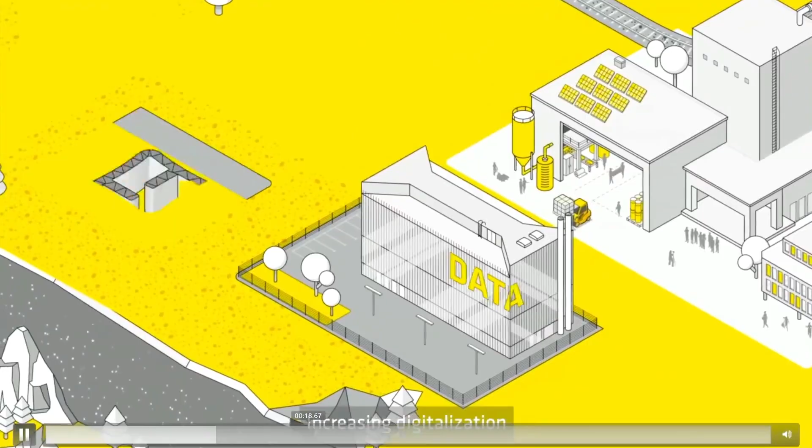For years, Sika has been pushing the construction and automotive industries forward, developing automation, increasing digitalization, and creating products with improved sustainable impact. In the modern world, you can find Sika's cutting-edge solutions almost anywhere, be it in building projects, critical infrastructure, transportation solutions, or renewable energy sources. Sika is driving change and powering improved performance, longevity, and sustainability.

Wherever you look, you can find Sika going beyond the expected. Okay, so before I proceed, let me give you a very quick intro to Sika first. I would like to make this a little bit more interactive. Anyone want to make a wild guess where Sika originated from? Can you just shout out a country? No, it's not Japan.

Yes, it's somewhere in Europe. Yes, Switzerland, yes. So Sika is basically a Swiss company, and we are a specialty chemicals company, responsible for supplying chemical-related materials for two different industries. First is the construction sector, which is where we are all in, and the other one is the motor vehicle industry, basically automotive. Some of you may not know that Sika is very much involved in automotive as well.

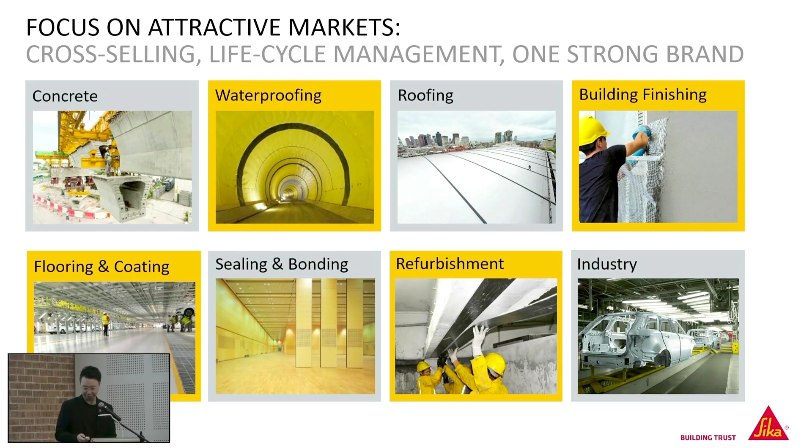Okay, so let me give you a quick intro to wet room. Wet room is a very common area, every building there's definitely a wet room. It's a room that cannot be avoided. However, it's also a room that is often neglected because of sometimes overconfidence. Sometimes it's specified with the cheapest material possible, and with that it may come with different sorts of problems, or even the wrong material sometimes.

So what does a wet room do? It's basically a room that is frequently wet, with water-related activities inside, especially toilets. That's why for wet room, it's always key to make sure that any exposed area in the wet room is properly waterproof, in order to prevent any form of seepage, whether to the floor below or to your unit below if it's a superstructure or high-rise residential structure.

Therefore, it's very crucial to select the proper or correct type of material that is durable and especially complements your tile setting material. Because oftentimes, especially for high-rise buildings or even toilets in general, the waterproofing may not complement together with the tile adhesive. I'm sure many of you may experience issues like tile debonding or tile hollowness. So we hope that in the next 1 hour session we may address all these issues, or all these concerns.

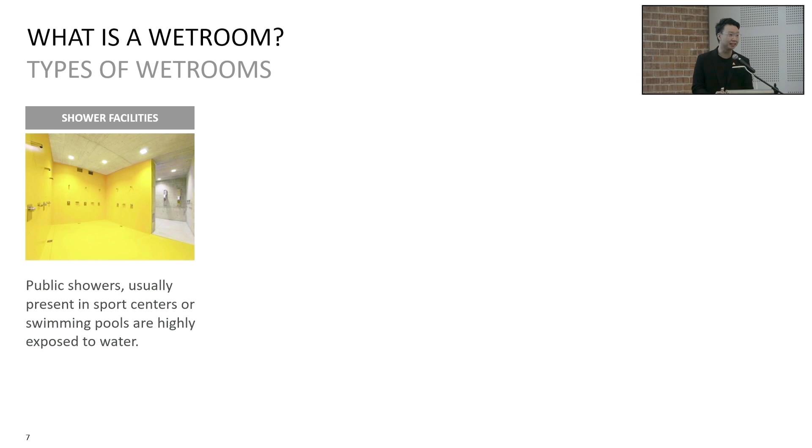All right, so what types of wet rooms are there? Firstly there are shower rooms, this is especially for public facilities. Then bathroom, this is for all residential units. Then there's kitchens as well, because many people often think wet room is only limited to toilets, but no, kitchen involves some water activity as well, therefore it is considered a wet room. Then there is also a laundry, or some may call it a yard. So these are considered wet room as well.

Okay, so why is waterproofing important? Because any water that enters your tile eventually will leak into your concrete structure, whether above or below. Therefore waterproofing is crucial to prevent seepage into a building. Oftentimes when there's an issue, when there's a leak or a defect happening, you may identify it as leakage or wet spots. And especially if it's serious enough, it will cause mold to grow on the floor below. Especially if there's a plaster ceiling, over time due to water exposure it will cause algae or mold growth, which may be hazardous to health.

There are two common types of material used for wet rooms in general. Firstly is the cementitious waterproofing mortars, or some may call it polymer modified mortars. These are oftentimes the most economical and workable, because wet rooms are more static with less movement involved, so waterproofing mortars are generally the favorable choice of material. Another material, not so common here in Malaysia, but there are certain projects that involve it as well, is what we call a polymeric liquid membrane, or liquid applied membrane. Later on I'll explain some of the differences between these two and also the requirements.

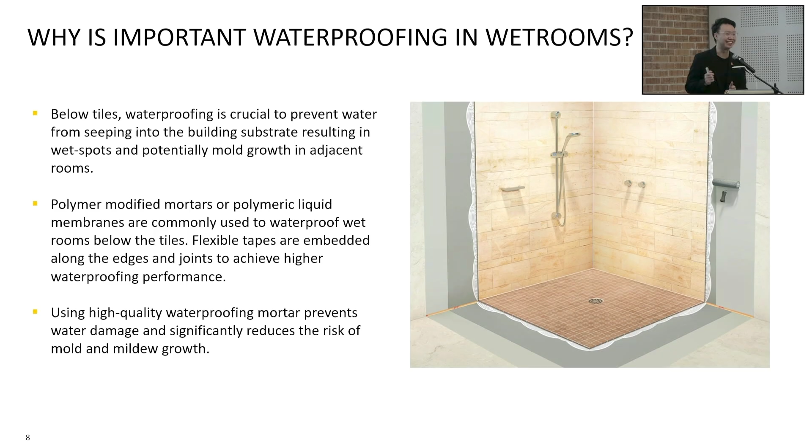Yeah, I see some are nodding ahead, in agreement. Yeah.

Okay, so some critical areas, basically surrounding the tiles. This is to debunk some misconception. Some will think that because tile is an impermeable material, but here is to show you that tiles are a bit porous as well, depending on the type of material. If they are porous, that means water is able to pass through tiles. It's not an impermeable layer. So as they allow water penetration, tiles are not 100% non-absorbent.

Another critical area as well is the joints. If you're using a cementitious joint especially, they tend to be more porous. That means there are a lot of air pockets inside, which allows water to pass through. But of course, for joints, there are different kinds of material. There's cementitious joint, or if you look into our booth later, we do provide epoxy-related joints as well. These are more watertight, promoting more water tightness compared to cementitious.

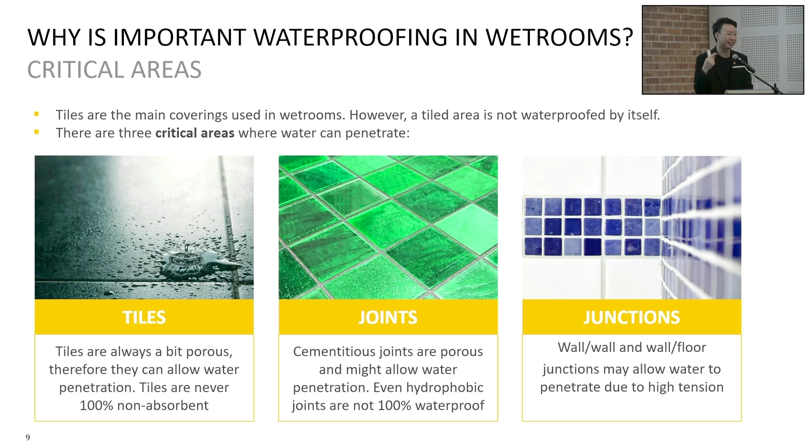Another critical area, this side is very, very important. Most often, leakage occurs because of this particular area, the junctions. Junctions are basically the construction joint between two structures, whether it's the wall-to-wall joint or the wall-to-slab joint. Another type of joint that's often neglected or less detailed would also be the joints between your downpipe outlet, your PVC downpipe, and your concrete slab. These are also another critical area where water would be able to leak through if not detailed properly with the waterproofing.

So what happens if there's no waterproofing? Let's say if the project forgot or the client missed out a certain area with the waterproofing, what will happen? Without the proper waterproofing, some issues that may occur are leakage and mold formation. Do not underestimate the issue of leakage, because to the general layman, leakage is just leakage, water can get in, so it's a problem that needs to be fixed. However, leakage will also cause further structural issues in the long term.

Because water enters through your concrete, it will start to corrode the rebar inside. As the rebar corrodes, it causes concrete spalling. With that, you need to spend more money, not just on the leakage repair, but also on the concrete repair, especially for a podium beneath the car park. This is oftentimes a very big issue because the leakage is happening all around. Either the facility management has neglected it, there's no repair, and concrete starts to spall, so they need to spend more money on the repair cost.

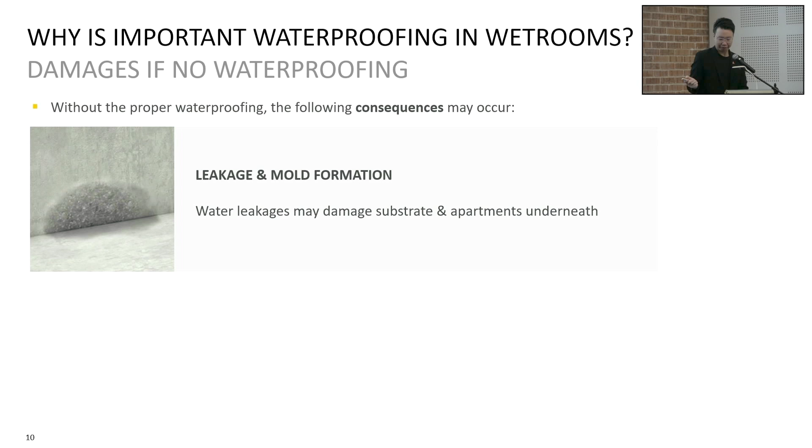All right, loose tile, HAFIZ will talk more about it as well. Any water that can enter your structure will firstly start to accumulate beneath your tile. As it accumulates, it will start to cause some delamination or debonding issue. So this is often another root cause of tile debonding or loose tiles. Sure, sometimes loose tile may occur also due to thermal expansion or thermal movement, but water leakage will also result in loose tiles as well.

Okay, so this is a bit of a quiz for you guys, also to be more interactive. Let's see how we can categorize this area into whether it's low, medium, or high water exposure. Let's start with a public shower room - is it low, medium, or high water penetration? High, correct. Public shower room is high.

Around bathtub and shower - okay, the first answer was correct, was medium. Not so, because people come out of the bathroom, not so much water dripping out compared to the public shower room. Around the tap, basically around your sink - lower, yes, correct. Private kitchen floor.

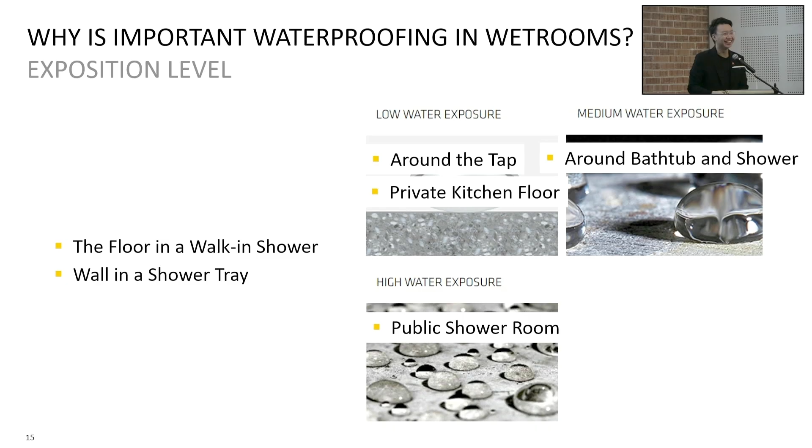Low also. Okay, the floor in a walk-in shower - this one is high, quite high, because people also just finish showering and then they come out, and especially when they're standing, water all drips down.

Okay, wall in the shower tray is considered medium, because this is the wall, not the floor. So we consider medium because it's mainly due to water splashing, not water flowing.

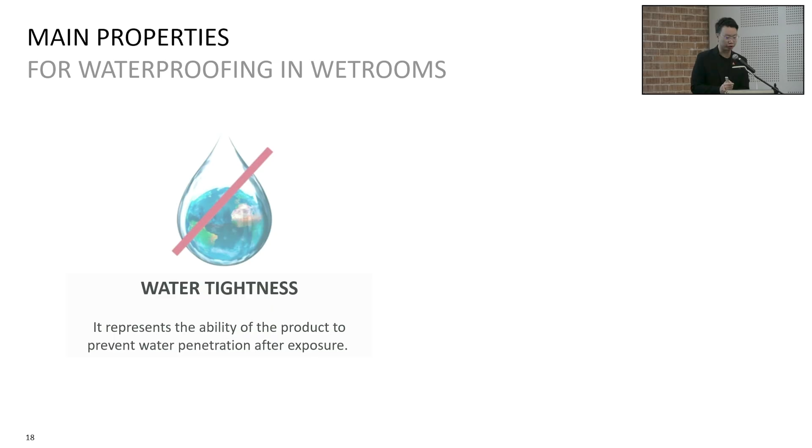Okay, so some main properties of waterproofing wet rooms. There are two important properties to note. Firstly, water tightness, or the performance of the waterproofing material. This is crucial - if your waterproofing material is not watertight, can we consider it a waterproofing material? Not really. So what is water tightness? It's the ability of a product to prevent any form of water penetration after exposure.

Another important property, often missed out, is crack bridging ability. Ask any engineering consultant, engineer, or contractor - they will never guarantee that their concrete is crack-free. No such thing, because every concrete cracks, it's just a matter of extent. Fortunately for wet rooms, it's more static, so there's lesser risk compared to outdoors. However, it's important that as your concrete cracks, your waterproofing material needs to withstand the cracks. Generally for waterproofing mortars, there's a crack limitation, usually up to 1 or 2mm. If you're considering a liquid applied product, there'll be higher flexibility. Just take note that crack bridging ability is important - if concrete cracks and your waterproofing cracks too, then it's compromised.

In Malaysia or globally, there's no one sure standard for all kinds of areas. But in Malaysia, EN 14891 is the general standard we usually conform to. This relates to liquid applied water impermeable products for ceramic tiling or building finishes. The rest are more towards the European standard.

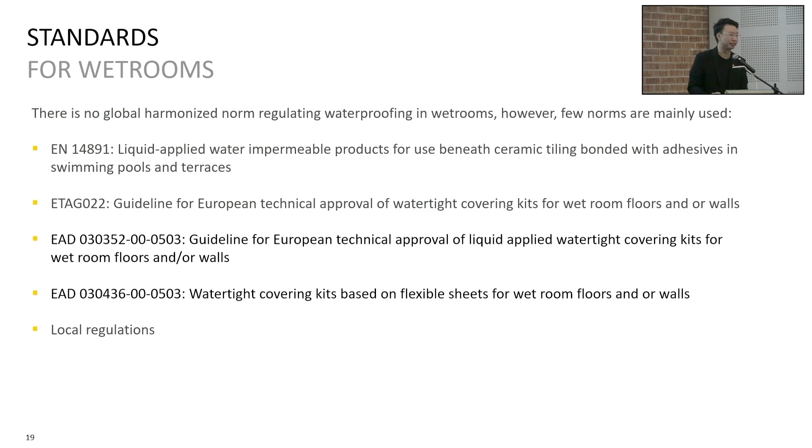Here are some main highlights showcasing some of the waterproofing technologies available. Firstly, cementitious waterproofing mortars - very easy to use, usually comes in 2 parts, part A and part B, which you mix together to form a cementitious slurry. Just use either a roller or a trowel if you want to maintain consistent thickness of your coating. Some limitation - because it's cementitious, it's more rigid, so it doesn't readily withstand extended movement. For example, a balcony is a semi-exposed area with thermal expansion due to weather or sunlight exposure, so you need a more flexible material there. However, for wet rooms, a rigid material should be good enough - it depends on how much movement you're expecting. If your building uses an IBS system - a prefabricated building system - that area will tend to have more movement, so you need a slightly more flexible material to withstand it.

Another one, liquid applied membrane, also easy to use, usually comes in part A and part B. If it's water-based, it usually comes as a single component. There's a higher requirement for this material - to apply a liquid applied membrane, your building's moisture requirement usually cannot be more than 4%. I know for paint the moisture tolerance is about 16% or 8%, but for waterproofing liquid applied, generally the substrate requirement is less than 4%. But what it provides is better flexibility for your structure, generating higher performance compared to cementitious.

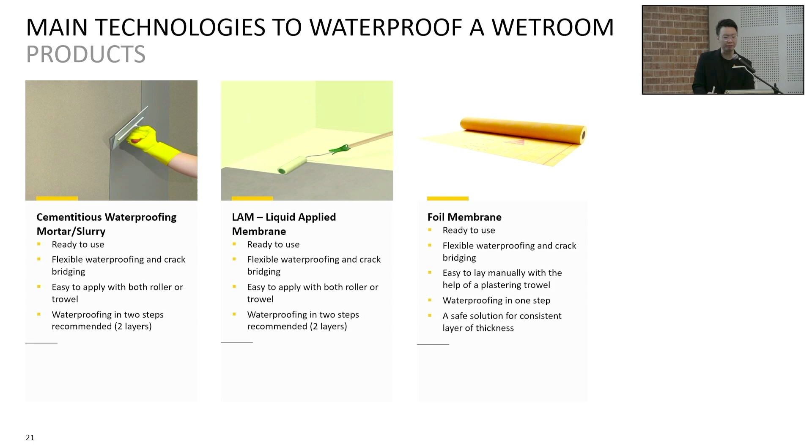Another one, foil membrane - not common here in Malaysia, but very common in Europe. This type of membrane doesn't work by itself; it's complemented by an adhesive, usually the cementitious waterproofing mortar. You apply the waterproofing mortar, then apply this foil membrane and stick it directly on. With that you get very good watertightness for your wet rooms. Not too common because of the cost - it's usually proposed for luxury residences or swimming pools, where foil membrane is considered for the extra assurance.

Okay, another one, this is more towards the joint treatment. These are the seal tapes for all the corners and detailing. What it does is basically an angled fillet replacement. Because any form of waterproofing needs an angled fillet for all the corners - basically a 45-degree gradient provided to make sure your waterproofing is able to upturn correctly without inducing too much stress. Because any 90-degree upturn, not just for cementitious but for liquid applied, will cause stress if it's a direct 90-degree sharp upturn.

So without an angled fillet, it will usually cause a crack along the joints. But sometimes a client does not want an angled fillet, so they will go for a seal tape, because the seal tape itself is a waterproofing material.

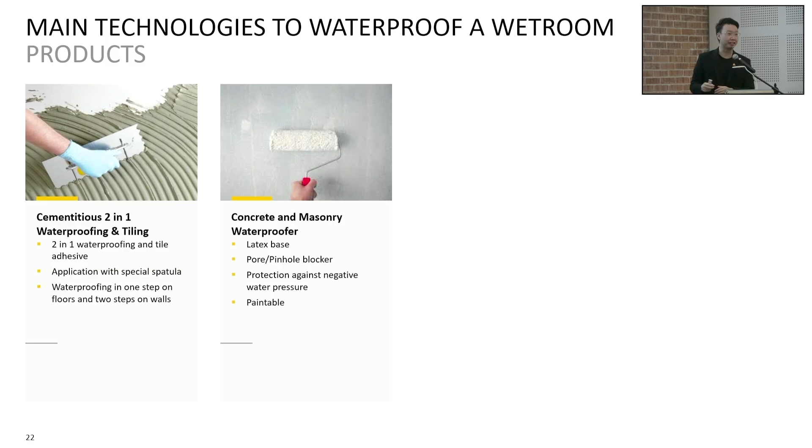This is just to give you some knowledge. Another one, this is also interesting - this one is concrete and masonry waterproofer. This type of material is more latex-based and is designed to withstand negative water pressure.

Very common, this one, very common in the US. However, because of how it works - it acts as a pore blocker, meaning it blocks any sort of pore along the walls - that's why you can use it against negative water pressure. That means if one room is leaking to another room, you can apply it from the other room to block the leakage.

But in the US, because of the effectiveness of this material, it caused a problem of its own. Certain housing in the US has basement structures for their homes, and oftentimes, because of the high water table, basements leak easily. So what they do is buy this latex-based material and apply it along the leaking wall. But because it completely blocks the pores or the leakage, water gets trapped inside their basement walls. Over a long period of time, the basement wall gets damaged because water is stagnant there.

It's not to say that this product is high risk, but it's because they use it at the basement. If you use it just along a wet room, it's generally fine because there's a low volume of water.

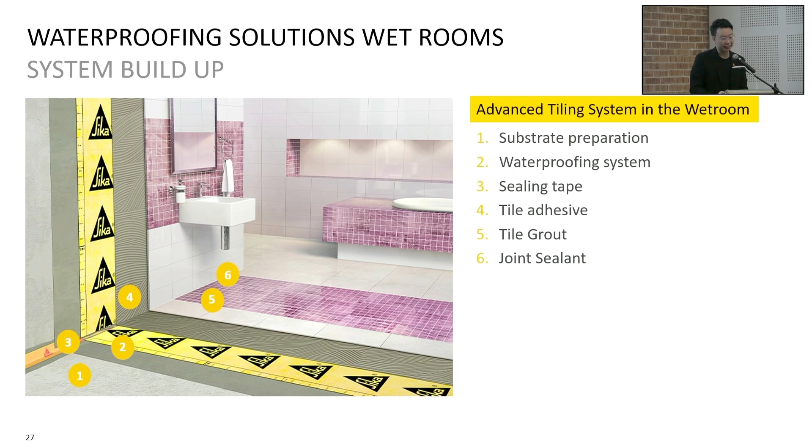So this is one of the systems using a foil membrane. One advantage of the foil membrane is that you can either install it along the concrete surface or install it on top of your screed material, immediately bonded with your tiles. So this is one advantage of the foil membrane - it's more flexible, whether you want to install above or below.

So some summary - these are usually the materials involved for your wet room system. Usually there's a primer, because it enhances bonding, together with either cementitious or liquid applied waterproofing. Then there's also a sealing tape or angle fillet. For info, in case you don't know, the angle fillet is this - you can see this triangle area here. This provides a gradient that is not 90 degrees. If they don't want an angle fillet, then there's a solution using the sealing tape instead.

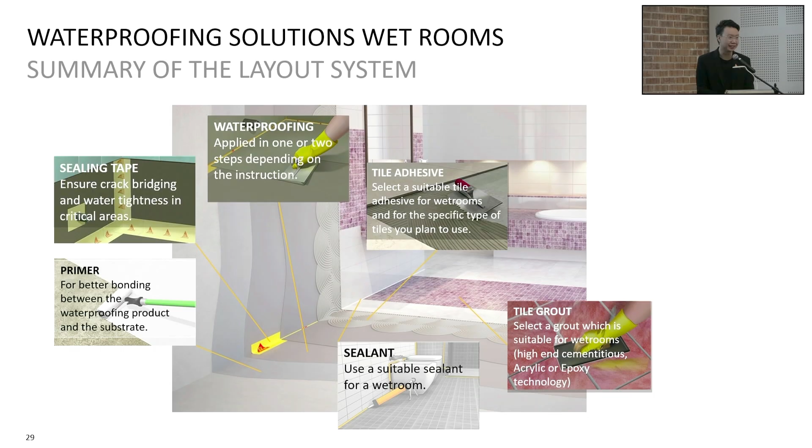So again, there's a primer, sealing tape, then there's also the waterproofing layer, followed by your tile adhesives and sealants for all the joints, especially the corners. And then there's also tile grout - a few choices there, either high-end cementitious, acrylic, or epoxy. Later on, if you want to find out more, our booth is outside showcasing these materials.

So lastly, this is the end of my presentation. Basically, my closing point is to speak to us, because at Sika we have a large team of experienced individuals, and Sika is also involved in some of the biggest projects in Malaysia. We have been waterproofing since 1910 - that's the start of Sika company. At Sika we have a wide range of products, providing a one-stop solution all the way from the basement to your rooftop, from waterproofing to flooring, building finishing, and construction joints.

All our solutions are aimed at reducing your risk and making sure our products provide value to your projects. Again, just speak to us, because we have a team of qualified experts providing specifications and design support. We even have specialists on standby in case you have any concerns about your project or any problems faced - you can just talk to us. So with this, thank you for your attention.

Wait, before I continue, is it possible for me to take a selfie first? Can what?

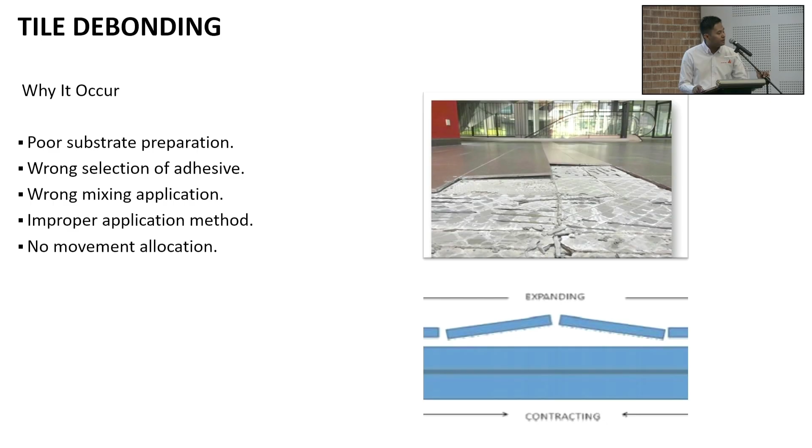Just a quick one on tile debonding issues. When we receive complaints from customers at projects, the first thing we check is the substrate preparation. Most of the root cause of these debonding issues comes from the substrate not being done properly. Second is the improper application of the tile adhesive — what I mean is tilers are not using the right tile adhesive based on the type of tiles they're using, which I'll explain later, and also their tile size.

So when we go to the sites and ask around and do observation, the first thing we check is the application — how tilers are using the tile adhesive. Normally, referring to this issue, what tilers do is they mix, say, 5 buckets or 5 pails, and go to smoke. After 1 hour, they only come back and do the installation. That is the first root cause we always find.

The second is substrate preparation, which is very key here, because the tile itself — like John mentioned — is neither fully absorbent nor fully non-absorbent. So if the substrate is not pre-wet before tile installation, it may cause the water in the tile adhesive to be sucked by the substrate. When this happens, it can cause debonding because the tile doesn't properly adhere to the tile adhesive. The third point is that we always observe tilers not using the right tile adhesive based on the tile itself, which I'll explain later — how to choose the right tile adhesive for your application.

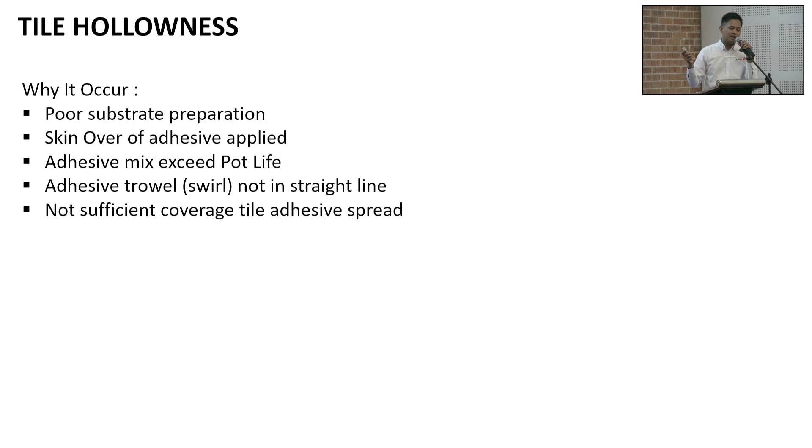When we check on site, the first thing we do is check on the hollowness, and then we ask the tilers to take off the tiles to check the back of the tiles, to see if it's fully covered by the tile adhesive or not. This is a very important key here, a very important note: to minimize the risk of hollowness, we need to make sure the spread of the tile adhesive at the back of the tile is maximum.

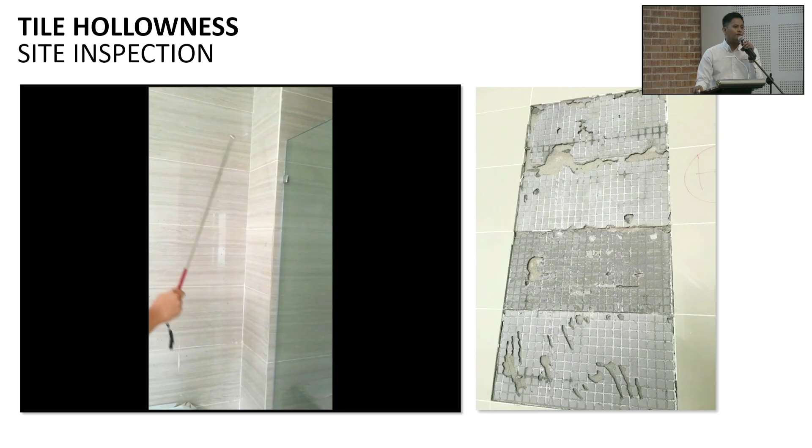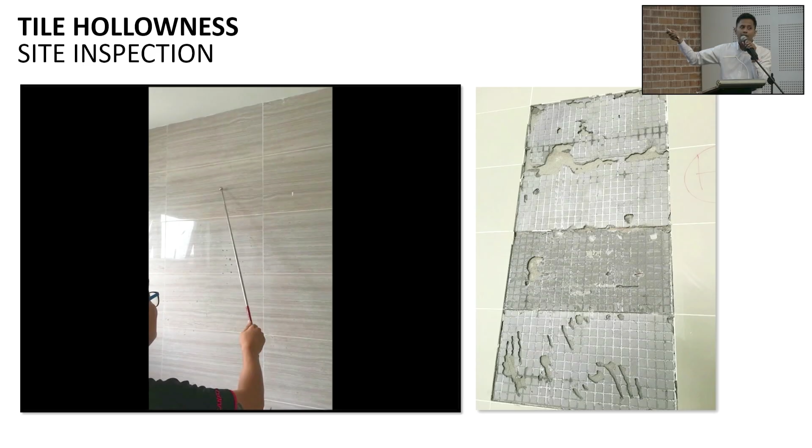This is a very common inspection. I think most tile adhesive manufacturers always use this when we receive complaints from our customers to check on hollowness. This is the sound of hollowness. As I mentioned earlier, we will ask our tilers to take off the tiles so we can check what's happening at the back. It is very common when we receive a hollowness issue.

The third common issue that we face in construction sites and projects is lippage. Lippage is mainly because the application area is open to public traffic too soon, before the adhesive itself is secured. This is a very common root cause of this issue.

The second point is the application and how the tilers install the tiles. If you're not aware, at the back of the tiles there's an arrow. This arrow is made by the tile manufacturer to guide tilers to install the tiles in one direction.

Now I'll go to how we choose the right tile adhesive during installation, because now we already know the three main issues that we face in projects.

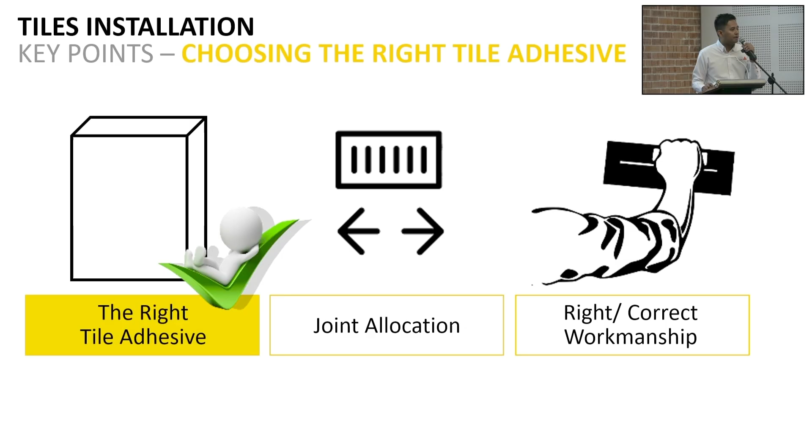When it comes to tile installation, we have to make sure these three key points are very important: choose the right tile adhesive for the application, the joint allocation, and most importantly, the workmanship. No matter how expensive or good your product, the tile adhesive and tiles you're using, if the workmanship is not good, not done properly before installation, you will have an issue.

When it comes to choosing the right tile adhesive, there are a few factors we always recommend to our clients. Number one is the type of finishing or type of tiles in your project - is it ceramic, porcelain, small tiles, or big tiles.

The second consideration is the type of substrate, because different substrates have different roughness and different water absorption rates. Very common in projects nowadays, we see concrete walls with a very smooth finishing if they use formwork, and we have brick walls, very common. Nowadays we also see drywall substrates.

The last but not least factor is where you apply the tiles - is it internal, for today's session, of course, internal wet rooms, or external application. Normally for external application, where the area is exposed to direct sunlight, you will require higher technical performance of the tile adhesive.

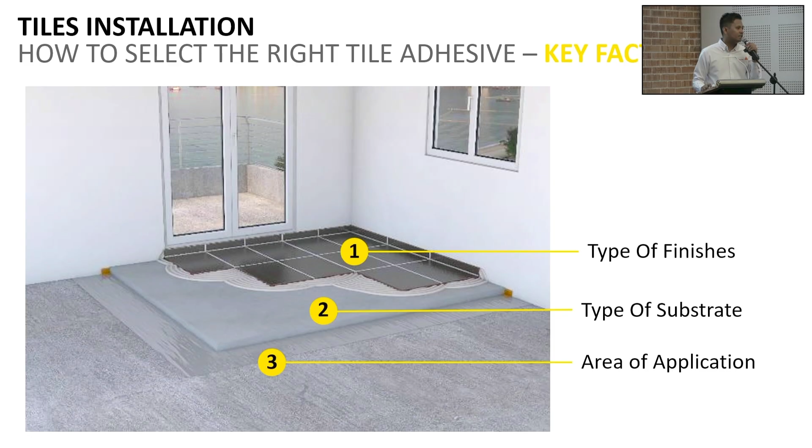Now I'll go to the first topic, the factors I mentioned earlier - the type of finishes, type of tiles. In Malaysia, all tile manufacturers follow ISO 13006. Under this ISO 13006, we have 5 groups of tiles, classified based on the water absorption rate.

It's very common in projects nowadays to see the B1A category - it's a porcelain with dry press manufacturing technology. Okay, you can proceed to the next.

The next important factor of the type of finishes or tile is tile size. Maybe 20 years back, the most common tile size was 1 foot by 1 foot. But nowadays, we can see big tiles coming in. The biggest tiles I've seen are 1.6 by 3.2 meters, not in Malaysia, but in China. Our neighboring countries like Indonesia and Thailand are also seeing these trends coming in. I am sure it's a matter of time before Malaysia faces this trend as well.

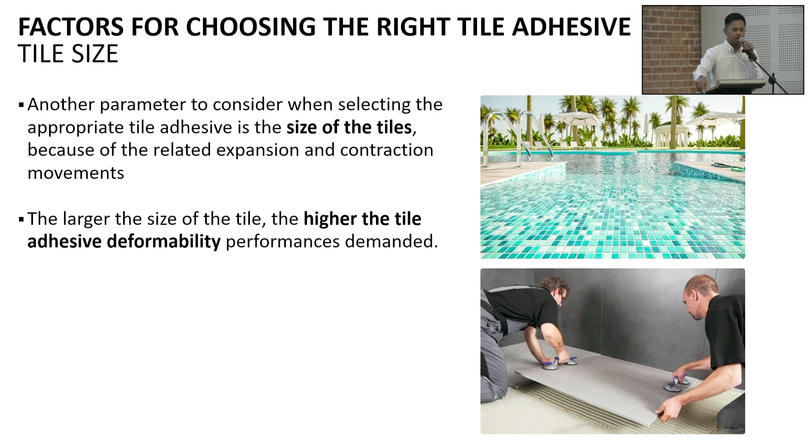The second part of the topic on how you choose the right tile adhesive depends on the substrate you're using. The three common substrates I have seen personally are concrete wall, brick wall—very common—and dry wall.

The next point is the area where you apply this tile adhesive. Normally, internal dry areas like the living room have less stringent requirements compared to external applications where heat is involved—the expansion of the tile, because tiles themselves can expand and shrink. This is very important for your consideration when you choose the right tile adhesive.

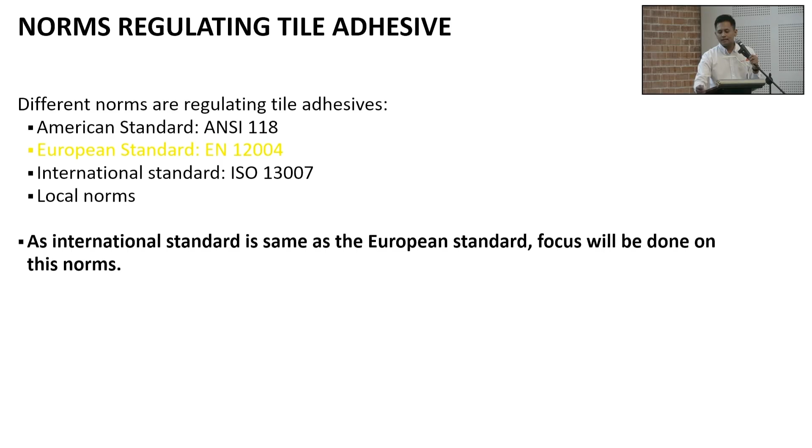Just a little bit on the norms that regulate tile adhesive products. Globally, we have a few standards, but in Malaysia we focus on EN 12004. What is in EN 12004? It regulates tile adhesive—cementitious tile adhesive, dispersion like acrylic base, as well as epoxy base or resin.

For today's session, I will mainly focus on cementitious tile adhesive, and I'll try to simplify it as much as possible so it's easy for you to understand. The technical requirements for cementitious tile adhesive in EN 12004—this is the must-have.

Number one is tensile adhesion strength. We measure tensile adhesion strength for normal condition, thermal aging or sometimes called heat aging, and third is water immersion. In Malaysia, the standard also has freeze-thaw cycles, but that's not really a concern for us because we are not a four-season country.

The next requirement in EN 12004 is the open time, which is 20 minutes. This is the first part of EN 12004.

The second part of EN 12004 is the improved characteristics of tile adhesive. It's not compulsory, it's optional. Number one is T, or thixotropy, also called slip resistance—the minimum requirement is 0.5 millimeters. The second improved characteristic is E, or extended open time.

And as you have bigger tiles, minimum 300 by 600 millimeters, we already start to use extended open time because it allows you to adjust, to apply the tile adhesive at the back of the tiles, and also to adjust the tiles when you install them. Slip resistant T is for wall or vertical application. S1 is mostly used for external applications where there's direct sunlight. S2 is not common in Malaysia—it's mostly used in countries where there is earthquake risk, like Indonesia.

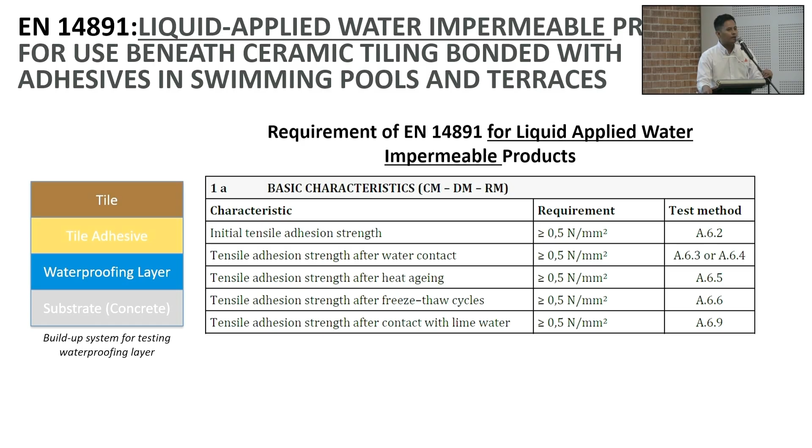This is an additional requirement I would like to highlight and emphasize here today. John has shared about EN 14891. This is for liquid apply waterproofing layers that we normally test at site and also in the lab. On the left side, the waterproofing layer build-up is substrate, waterproofing layer, tile adhesive, and tiles. According to this standard, it's not only cementitious waterproofing materials, but also dispersion like LAM (liquid apply membrane), DM, and RM (resin, epoxy base). The minimum requirement for this standard, for any type of tile adhesive, either C1 or C2, is 0.5 MPa. This is very common testing done at site when it comes to waterproofing layers.

That's all for tile adhesive standards.

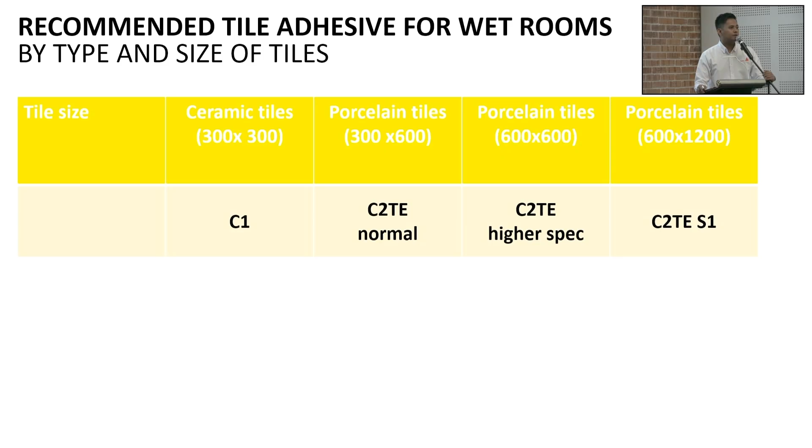Now I will move to how we actually choose tile adhesive for internal wet rooms based on the type of tiles. I'll summarize this in a very simple way to help you select the right products for your internal wet room areas. For ceramic tiles of 300 by 300 millimeters, we recommend minimum C1, though you can go above. For porcelain tiles of 300 by 600, it's C2 TE. Most manufacturers have two levels of C2 TE products: normal and premium, with premium having more adhesion strength. For porcelain tiles of 300 by 600, we recommend normal C2 TE. For bigger tiles up to 600 by 600, it's recommended to use C2 TE premium or high spec. For porcelain tiles above 600 by 1200 millimeters, use C2 TE S1. This is a general guideline for tile adhesive selection for your wet room projects.

The next important consideration is joint allocation. It is very crucial to avoid tile buckling issues. For wet room areas in the bathroom, we recommend joint treatment using sealant at the joints, exactly as John mentioned earlier. This joint area is very critical in wet rooms to avoid buckling issues later on.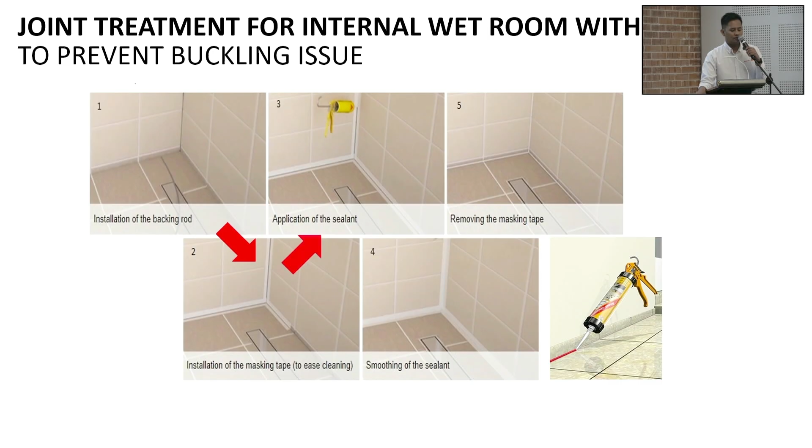This is a very important part. I think I will spend more time on this workmanship factor because it affects all of us - it affects the tile adhesive manufacturer, tile manufacturer, as well as you.

Substrate preparation work is very crucial - it's important to make sure the substrate is clean, with no oil, especially when it comes to formwork application. There's always oil, so we have to remove that. Before installation, we have to make sure it's pre-wet - not flooded with water, just a little pre-wet, so that the substrate will not suck water from the tile adhesive.

An additional point we'd like to highlight is the back of the tiles. Some tiles show white powder at the back - this is very common because of the manufacturing process. When they manufacture the tiles, they put powder at the back on the tray, resulting in white powder at the back of the tiles. We recommend our clients and tilers actually clean the back of the tiles to ensure better workmanship.

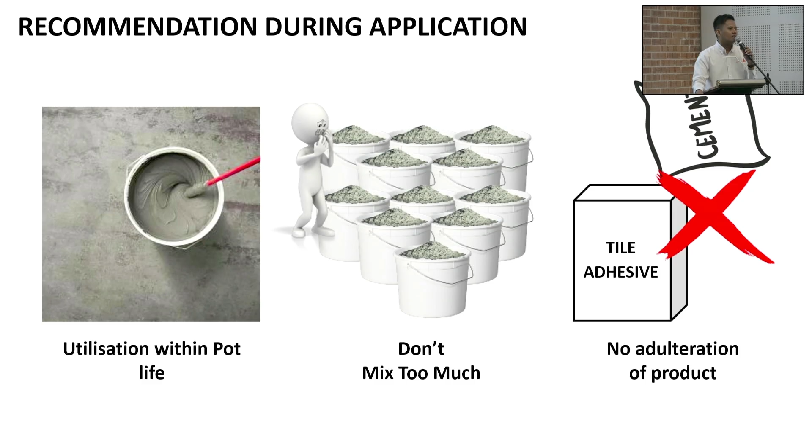The tile adhesive is a pre-pack, so everything's already inside — you just have to add water. Nowadays it's rare to see tilers or applicators adding something else like cement or additive. Back then, maybe 10 years ago, there were plenty of workers who added something inside, or only God knows what that was. But please, if you see this at site, tell them you don't have to add anything else, just add water and mix.

When the pot life is over, skin over formation happens. This is a thin layer on the mortar, especially when it's hot or too windy. When skin over is formed on the mortar, you can check with your hand — just touch it. If nothing sticks on your hand, that means skin over is already formed. What we recommend to site is to just remove that layer and remix again — it can still be used.

But for open time, when you apply on the tiles or on the floor or wall, if the open time is exceeded, you can touch it first and if there's no mortar on your hand, we can just trowel it again. Or if it really cannot be used, just remove it and apply another layer. This is the right practice and what we recommend to our tilers.

Just a quick one, based on the audience's expertise or experience — which one is the best way of applying tile adhesive? Just a quick survey: who says it's back buttering? Raise your hands. Who says troweling? Who says both of them? Okay, 2% are right, so that is the best practice.

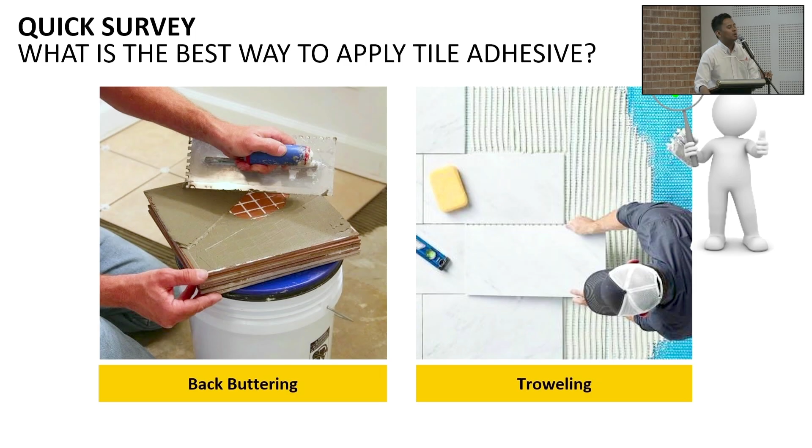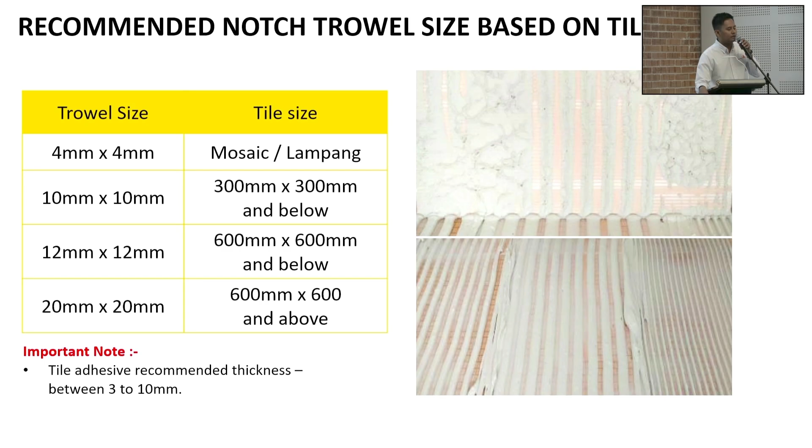Another recommendation is to use the right notch trowel. You can also do inspection during the project — go to site and check which size of the notch trowel is being used for your tiles. This is just a minimum trowel size requirement recommendation. You can see here, 10 by 10 is very common at site, and we recommend using it for 300 by 300 tiles. Of course, as the tile size goes bigger, it's recommended to have a bigger notch trowel size.

This is the right process for installing tiles at site. As I mentioned, the best way of installing tiles is using both back buttering and troweling. Then you put the tiles, install them, and tap to make sure the tile adhesive spreads evenly at the back of the tiles. Check the level, and for confirmation, just turn over the tiles.

This is something we always do at site during inspection — just to make sure our tilers are doing it correctly, we ask them to pull the tile so we can see the coverage at the back. If it's not fully covered, we ask them to do it again or add more tile adhesive to make sure it's fully covered.

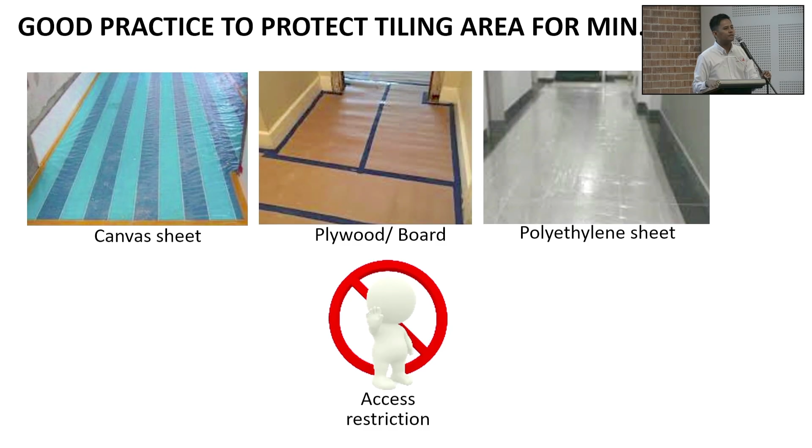This is a good practice that we've seen so far — covered, thank you so much. Cover the areas for a minimum of 24 hours, just to make sure leakage issues or other issues don't happen in the future.

I'll finish with the tile grout products and solutions that can help manage your project properly. This is a very common issue we see in tile joints — efflorescence. This is very common, especially for cementitious tile grout, mostly because of the way we apply the products. For swimming pool areas, we normally recommend a higher spec of tile grout. Unfortunately, in Malaysia most applicators are using a very basic tile grout, CG0 or CG1, which is not enough for this type of application.

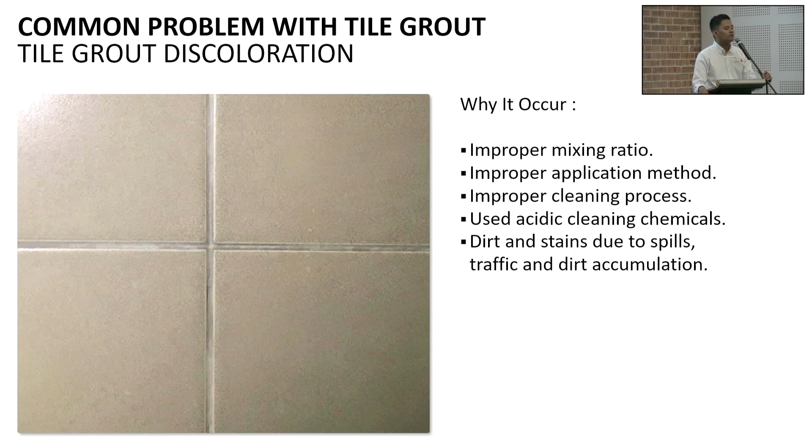This is also another common issue in tile grout application: discoloration. In the market we have cementitious tile grout, epoxy, and dispersion acrylic base, but I would highlight that epoxy tile grout is the best. It's a bit more expensive, but it gives a better finishing. Most epoxy products come as one set, so the color discoloration risk is minimized and it has better performance. Normally it's waterproof, much better than cementitious tile grout, and also more durable.

Okay, I see my notification. I have a quiz, can I get 5 minutes? Okay, it can also be part of the Q&A session. We have some small gifts. John, maybe you can come also.

So this is the first question: what is the right steps for wet room application? It's not arranged according to the right sequence. Anyone will try?

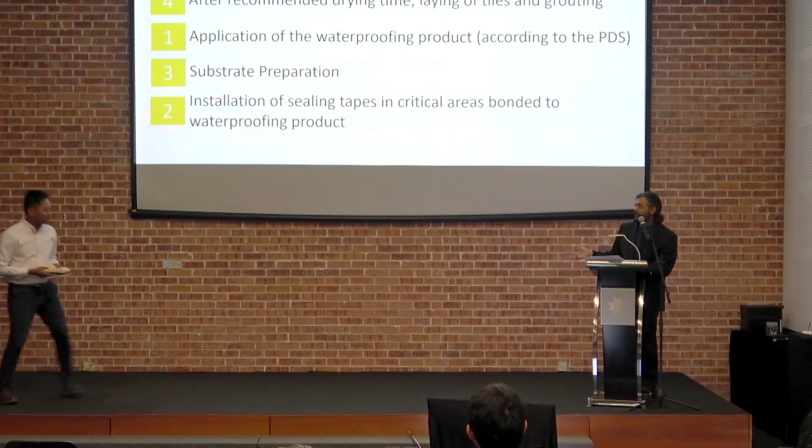So anyone would love to try this question? Okay, this is a lady with the mask. 3124? Is it correct? Actually it's correct, 124 is okay, yeah, actually it's the right answer. Congratulations, this can be either way, for two and one. Yep, you're right, small gift.

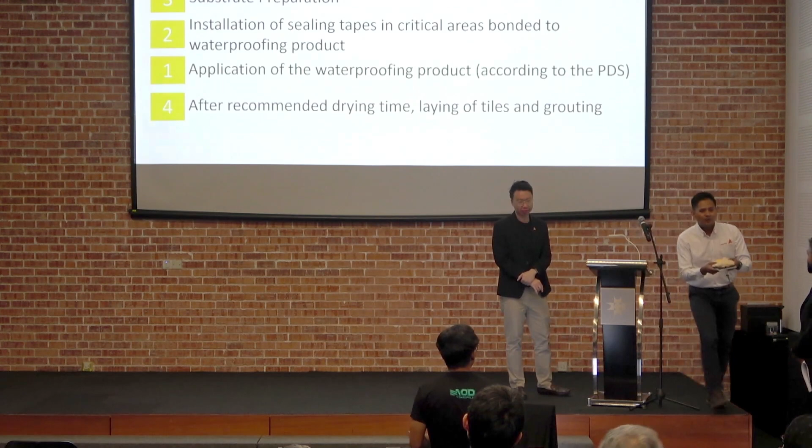Okay, congrats to our first winner. Is that someone's PIN number, by the way, or ATM machine or something? 3214. Okay, so can we have the second question to the quiz? We got 5 gifts to give away.

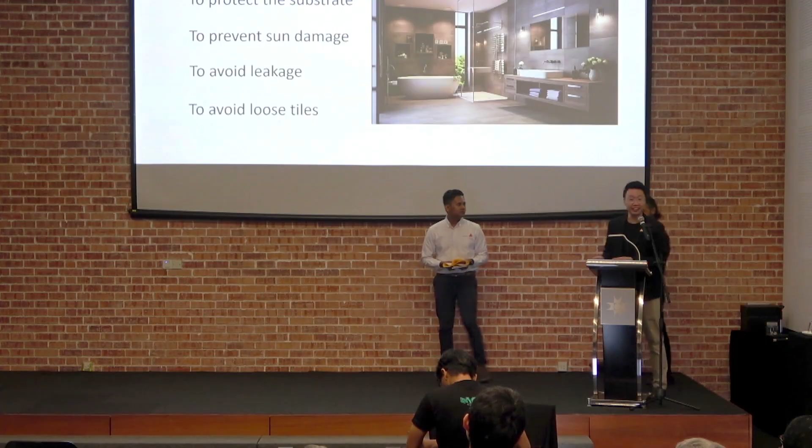Okay, this one is a bit multiple choice: why is waterproofing needed in wet room? Of course, to avoid leakage. That's one, any more? More than one answer. Just one is a bit incorrect, anyone want to try? Sorry, 1 and to protect the substrate. Okay, 1 and 3, let's see, this is correct. Waterproofing is not meant as a UV protection material, and then yes, avoid leakage, and actually it's to avoid loose tile also, but we can give that.

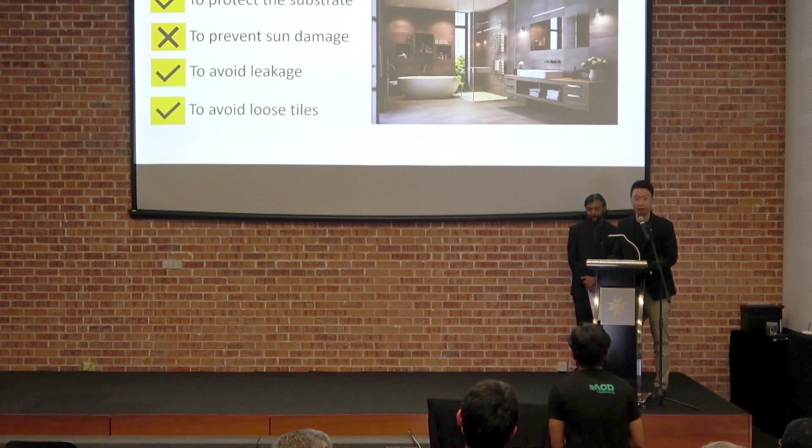One thing I want to add here: to prevent sun damage, because a lot of people think they can just apply the most basic material, for example for their rooftop or car porch. We did encounter a lot of situations where clients, usually homeowners, apply a cementitious waterproofing for their roof slab. However, because it's directly exposed to outdoor conditions, it causes rapid shrinkage, and as a result your cementitious coating will crack. So this is just an add-on.

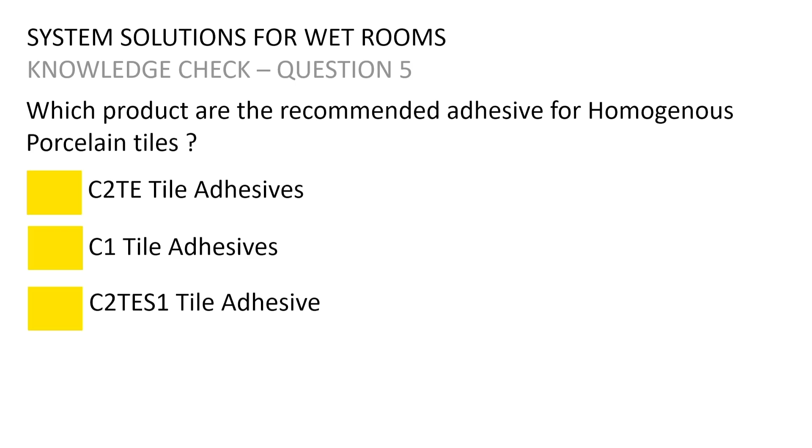Okay, last one: which product is the recommended adhesive for homogeneous porcelain tiles? There's one behind that, for both normal size and big size. I'm giving a hint here. C2TES1, who said that? There's a gentleman behind there. C2TES1 only. C2TE also, yes, the right answer.

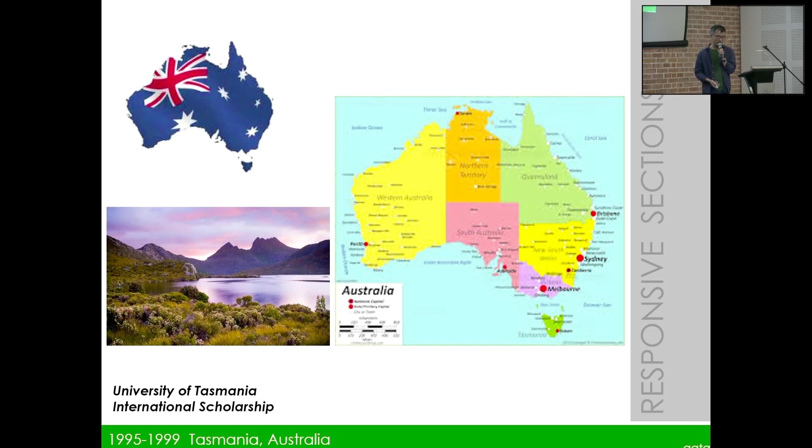I studied in Tasmania, a small island state. Most Australian graduates would probably study in Melbourne, Sydney, Perth, Adelaide or Queensland, but Tasmania would be the last choice. It happened because I was offered a scholarship, which saved a lot of school fees. During the formative years in Tasmania, since it's a rather rural setting, we studied in the city of Launceston, which has only 200,000 population. Some of our lecturers and professors designed small, beautiful houses in natural settings, compared to the Melbourne and Sydney schools, where students would be exposed more to an urban setting and urbanized design.

We started the first year of our work by exploring building in the landscape context, looking at spatial orientation. Inevitably you have to deal with sections, because of the roof and openings where you bring natural light into the spaces. So we were exposed to sustainable design at a very early stage - even without GBI, we naturally became inclined to design very natural, responsive spaces. It teaches us how to appreciate nature. Although I grew up in the kampong, in Malaysia with lots of green spaces, we never really appreciated nature. Only after studying in Australia did I come back and see that our country is very beautiful, and that there's a lot we can do as architects to preserve our pristine nature.

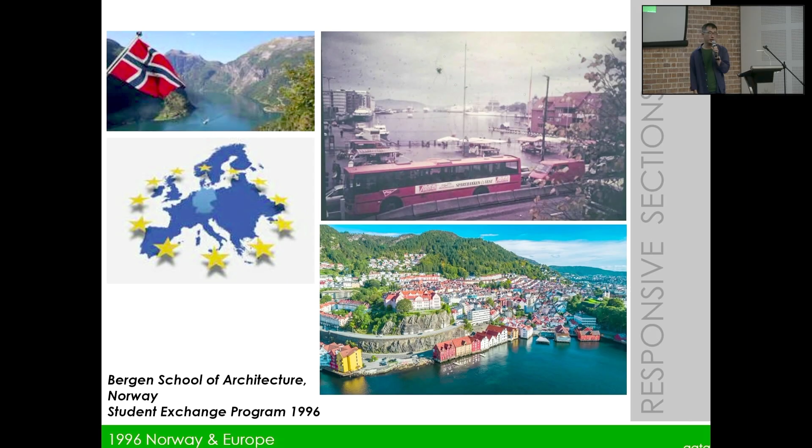During my studies in Tasmania, I also went for a student exchange to Norway. That was, I think, the biggest and most important decision I made as a student. Rather than just stay in Australia, which is so isolated - you can't see buildings like those modernist works by Corbusier or Alvar Aalto unless you go to Paris, where there are so many beautiful buildings we study in textbooks but never get to experience - I took the chance and went for a student exchange to Norway. I also backpacked around Europe for 2 months, visiting about 9 to 10 countries.

As an induction course for student architects in first year in Bergen, Norway, we actually had to build a small building in the forest. The timber was sponsored by a timber plantation company - similar to the furniture you see in IKEA, which uses plantation timber considered a sustainable material, since you don't chop down rainforest or old-growth timber, but harvest plantation timber for the furniture and building industry.

So we had to build a small structure without much prior knowledge. The students came together, made a model of it, and then started building. We only spent about 2 weeks there in the forest to build this. You can see there's already a collection of buildings, because it's a tradition there that one batch follows through from another to build these collective structures.

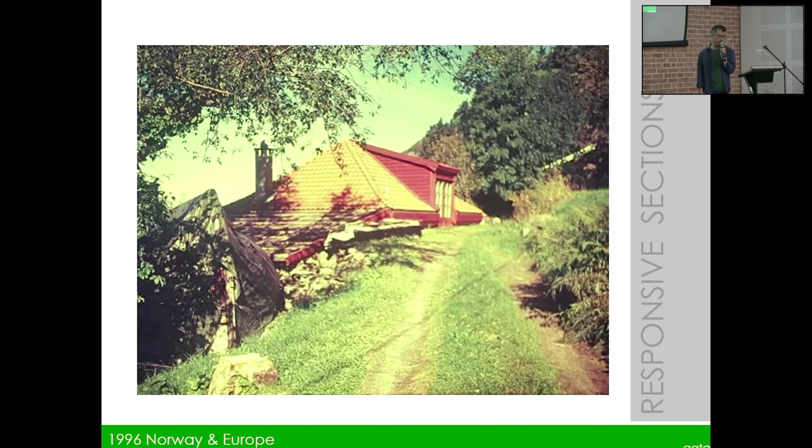And I also managed to rent a beautiful house owned by an artist. He's a printmaker, and he converted these so-called farmhouses into his studio. So the experience of living in this kind of building also, I think, helped me shape how we design spaces as well.

So I think this is like a pretext to the projects that I'm going to show you later.

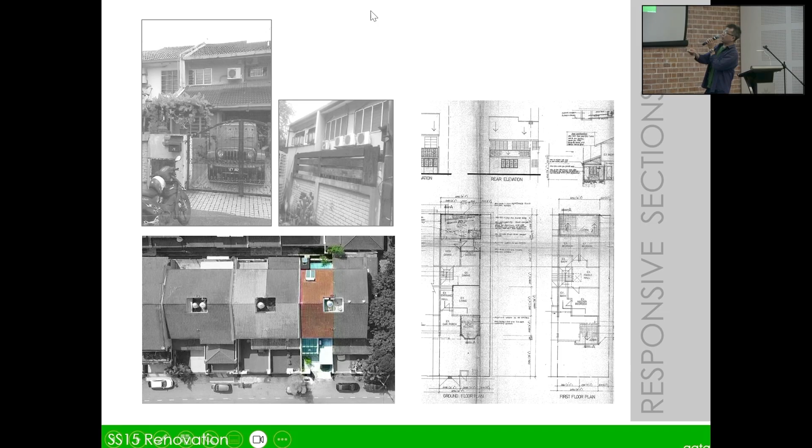You can see that it's basically in Subang Jaya. Single car porch - we managed to convince him to keep it as a single car porch. That's a view of the rear of the building with all the aircon stacked on top of the first floor.

A typical terrace house in Malaysia would have the living room as the priority, but most owners would extend the car porch to a double car porch. So therefore, the living room is always very dark.

You have to turn on lights even at daytime. Dining is stuck in the middle with no natural light, no views - a very introverted space. Maybe they hang a piece of oil painting or batik in that space just to decorate it. But the dining room actually doesn't have any natural ventilation either. The kitchen at the back with the guest room makes the space even worse, preventing any light from coming into the center of the space.

So what we did was kind of change the whole idea. We want to make the house bring in natural light. We also reversed the location of the dining towards the back of the house. You can see here in the section, the open kitchen, and then the dining is at the back. So the original dining area just becomes a part of the lounge area, the living space.

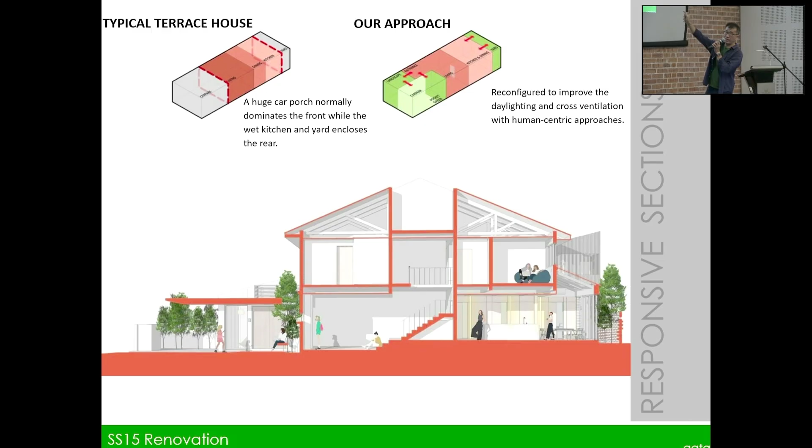And at the front as well, we tried to bring in the so-called concept of the lanai in front of the living room. These axonometric sections show all the green elements, which are actually the new attachment or new extension to the original house. You can even see here the detail of the car porch - we did not attach the whole car porch roof to the building, but created a gap that brings in some natural light into the entrance to the living room or the house.

Towards the back, the traditional kitchen and guest room division - we took out all the walls and then put all the nitty-gritty things on the left, with the storeroom, a bicycle store because the client is actually an avid cyclist, and the powder room as well. That lines up on the left, opening up the whole dining and kitchen area. Of course, the kitchen is an open kitchen concept. Then there's a pocket garden in the back as well. So the front and the back, we actually brought in some natural greenery and natural light to the space.

Of course, talking about sections is an important part of design, so we show you the details of the section. You notice also on the first floor there's some addition at the back - that's actually the laundry area. So all the bedrooms upstairs don't need to bring the laundry down and back up again to the upper floor bedrooms. They do the laundry upstairs, so it's very convenient. The laundry room also has a skylight, as shown in the sections.

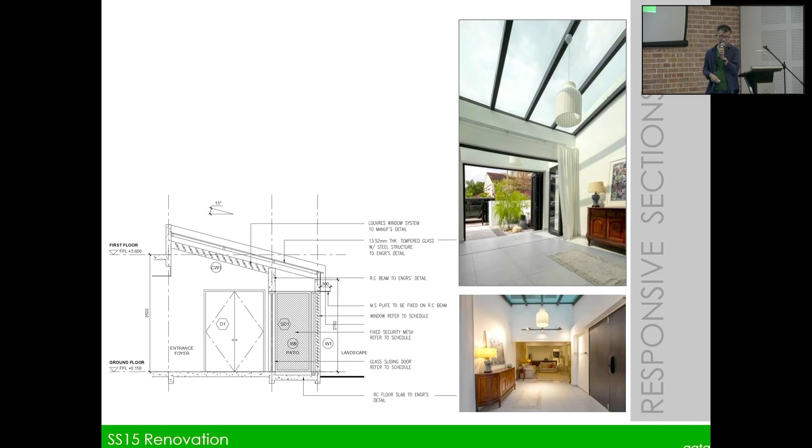But the client later on added automated blinds, because he felt it was time to do something about it. Although he actually helped me check the average temperature - below this it's about 26 degrees in the morning, and by noon it reaches 30 degrees. So at 30 degrees he still thinks it's bearable, but for me, it's above the comfort zone really.

Although the pocket garden is only 4 feet, it's actually good enough. It effectively brings nature from the outside into the inside. And also with this feature brick wall, it also brings natural breeze into the space as well.

Another thing to talk about is the detail sections here. Just now, the speaker from Sika talked about waterproofing, and how to prevent water or moisture from damaging our concrete substrate and causing leaking. The other thing we have to look at is how we can design our bathroom to be more environmentally friendly and also more user friendly.

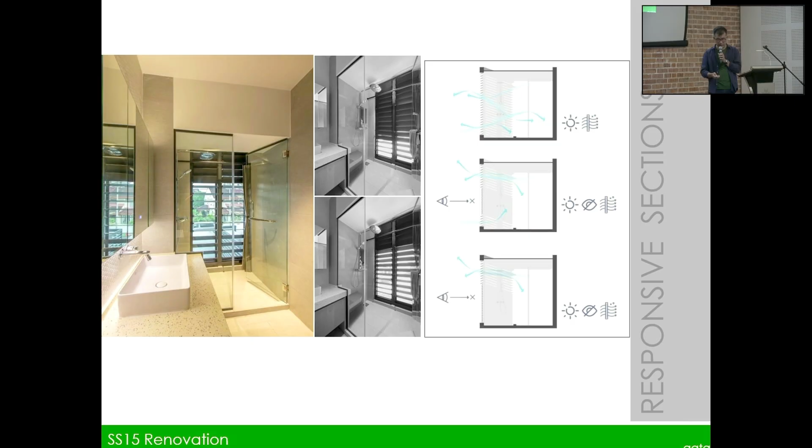You can look at the comparison between this window or louvered wall with the traditional Malay kampung house. They are so similar in terms of inviting natural sunlight and providing very good ventilation. So some of our spaces are actually inspired by traditional architecture you can find in Malaysia, be it Malay or Chinese typology. The next project is actually a courtyard terrace housing.

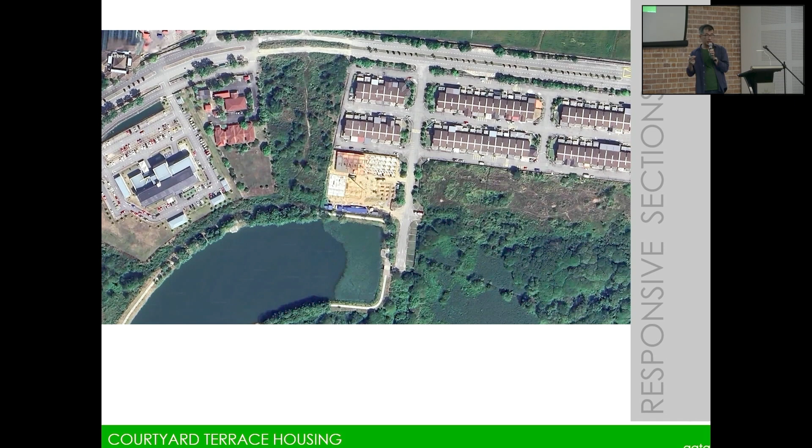So we're taking it up to another level. From a small terrace house renovation, we try to explore the idea of sustainability in a larger scale. This project is just 2 rows of terrace houses located in BM, Bukit Mertajam. The row at the bottom is facing the lake, and the row at the top is facing existing housing.

When we did the master plan, or layout planning, we initially planned it as 20 by 70, but the client wanted to push it to 18 by 70. That means 18 feet width, so he could gain 2 extra units for the total units, and in doing so increase his GDV. No doubt, working with developers, we have to deal with all this feasibility.

But within this, we explored whether this opportunity would allow us to study the sustainability issue on a larger scale of buildings. So here we tried to introduce the idea of an internal courtyard, inspired by traditional shophouses you can find in Georgetown, Penang, and also in Malacca, where the courtyard brings natural light and ventilation deep inside the traditional shophouse typology. Some in Malacca you can find double or triple courtyards.

In Penang it's also quite common to have a double courtyard, because the lot is pretty long, 100 to 120 feet. This courtyard serves as a space for family members to gather, because naturally you have the natural light and it's breezy as well. So to us, the courtyard doesn't just serve the environmental needs of the house, but also serves as a social space, a central gathering spot for the property.

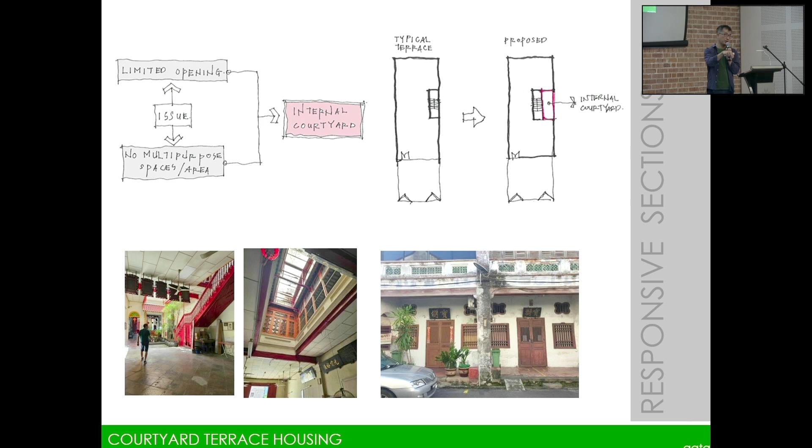So this is basically the floor plan. You see that the courtyard is basically just an airwell. It wouldn't qualify as large as a courtyard in the traditional shop houses. However,

this device actually changed the whole planning of a typical terrace house. You can see that we actually moved the staircase to the middle part of the house next to the courtyard, so that we open up the full living area. So the living room actually enjoys an 18 feet wide space compared to a typical terrace house.

Some of the typical terrace houses, although 20 feet or 22 feet, have a staircase that goes up to the upper floor. That staircase is already 4 feet. So with the 20 feet terrace house, you lost 4 feet already from the start, right?

So in this case, we actually moved the staircase to the middle so that the staircase and the dining area forms the heart of the house. Because in Malaysia, Chinese, Indian, Malay, food is an important part of daily life. Makan, having a meal together, is so important. So we link up the dining, the staircase, and the courtyard together so that this becomes a nice gathering spot for the family members.

And also you notice that the bathroom at the back was shifted to the center of the house, because with the courtyard or the airwell, we can provide natural ventilation. And it frees up the space at the back of the house. Both of the bedrooms now enjoy very huge openings, because traditionally that bathroom created a kink, and those two bedrooms were actually very poor in terms of quality of light, without much flexibility in furniture arrangement. Not even the windows, also actually very small.

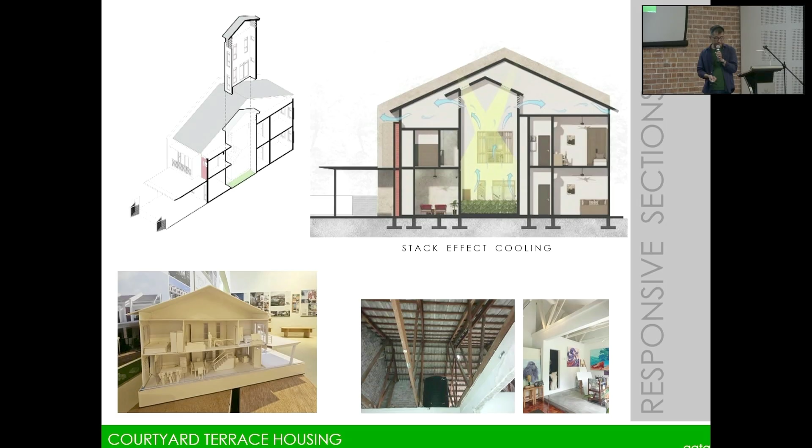So this is a view of the so-called courtyard or airwell. You can see that there are so many openings facing this, right? There's a huge window that opens to this. Then on the upper part we have some ventilation block as well for the front and the back.

And on the top, we introduce this Monier skylight. Just 4 pieces, sufficient to increase the lux level to a very satisfactory level. So even this, you can see that the space is quite bright actually, without any artificial lighting.

So to us, it's very sustainable to live in this kind of housing.

And this is a view when it's under construction, the living room, full 18 feet wide, without the staircase. So the staircase forms part of the so-called dining area, and that stairwell actually also introduced kind of a double volume skylight coming into the ground floor as well.

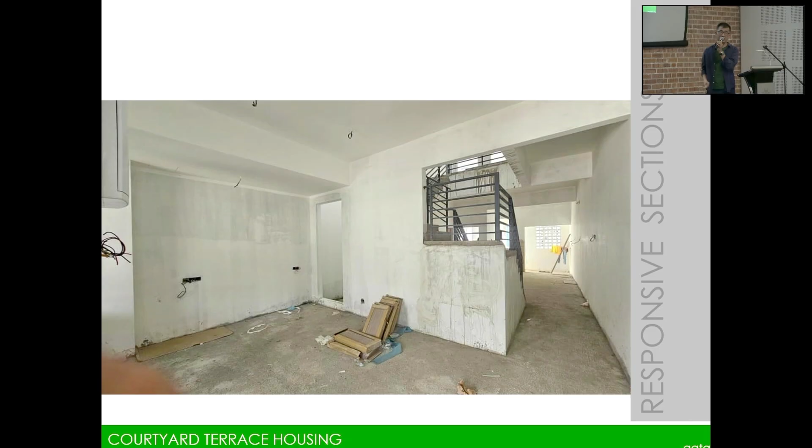And there's a window on the left. This also brings some natural light into the living room. Because most of the time we will have a double car porch in the front.

Yeah, this is the stairwell. The stairwell also introduced like an airwell and a light well into the lower ground of the space. And it connects the upper floor family area to the dining space below as well.

So most terrace houses actually divide the upper floor and the lower floor clearly. There's no interaction between the upper and lower floor.

So yeah, that's basically just a rendition of the floor plans.

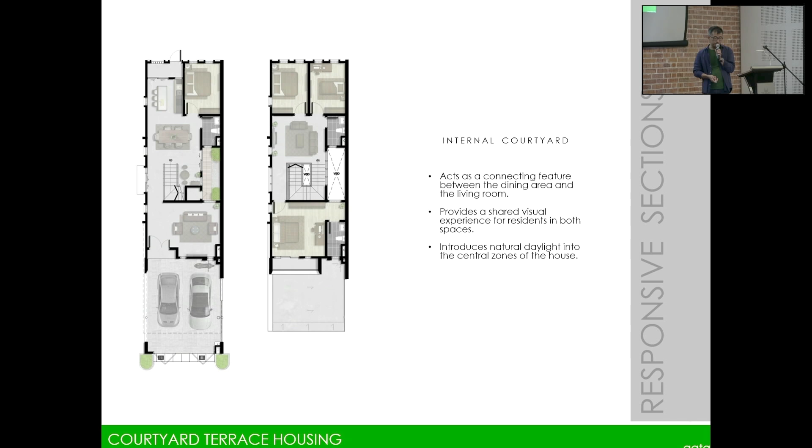So this is the end result, the first full row of the terrace house. You'll notice we did not go for the mirror left-right design; we actually used the same design, just repeated. So I think the house has a more individualistic look. With the party wall, and then the courtyard roofing over it, which is set in from the front elevation, that gives you a more three-dimensional feature to the house.

We also introduced what we call the facing brick. Of course, due to cost budget constraints, we couldn't use facing brick, so we only could live with facing tiles instead, Suzuka tiles, just to get that color.

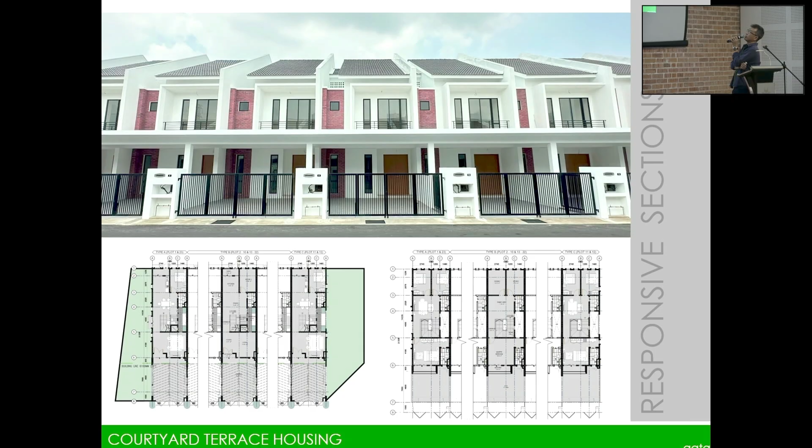So this is the finishes involved, from acrylic skylight, vent block, facing tiles. We wanted to have some off-form scheme for the wall as well, but the client opted for a painted finish.

Okay, that was the second project. Now we are looking at the third project. This is different, this is not a housing, this is actually a school. It's located in Bukit Mertajam. It's my alma mater, high school.

The site is actually located next to the river, Sungai Juru. The blue colored ones are all the sports facility. And then in the middle is the main school building, which was completed about 30 years ago, in 1993.

So when we took up this project, the school board wanted us to design a new academic block to house 35 classrooms, one set of science labs, which is 4 labs, physics, chemistry, bio, and general science, and also several computer labs and a new canteen to cater for the needs of students with full day schooling, rather than previously having morning and afternoon sessions. Now they are going to do the full session in the morning.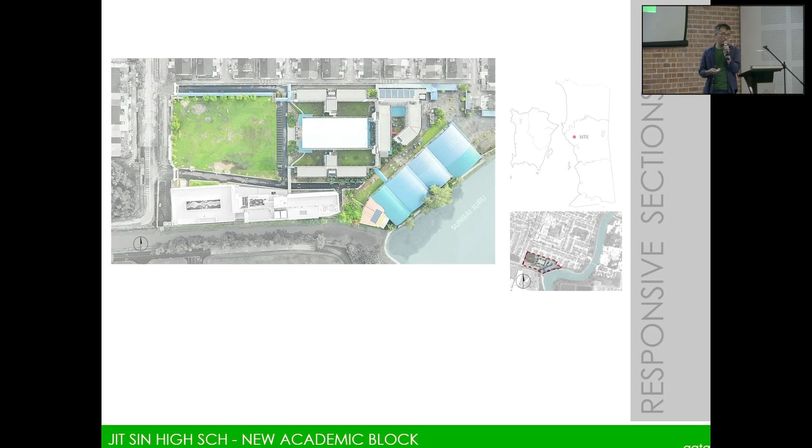But I think the good thing is that although it's very long and narrow, it's facing north and south. So in terms of passive design, it's just perfect because you don't have to worry about the morning sun or the afternoon sun.

Of course, dealing with schools, most of the time, I think those of you working with JKR are stressing on IBS, and they want fast, speedy construction, quality construction for the school building. But in my opinion, I think JKR's approach of treating it as a kind of construction challenge to have speedy construction and neat, good finishing doesn't answer the call for quality education.

We need to look at school buildings beyond just purely a technical challenge. In our opinion, I think the school nowadays, especially for the 21st century, should move beyond teaching in the confined space of a classroom.

Nowadays the kids are very smart. They don't even need to come to class because they can find all the subject matter on YouTube. Even YouTube teaches you everything, how to bake a cake, how to do anything. So the kids, if you don't design inspirational space for them, I think they'll lose interest in coming to school. So that's our approach when we were given the task.

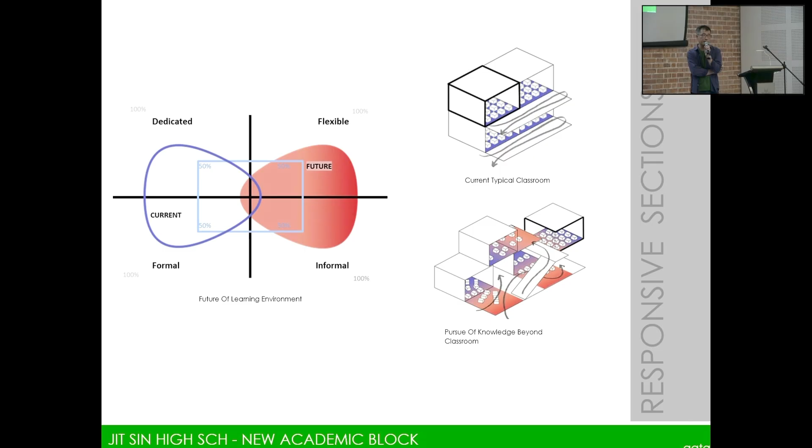We try to do something different, while still fulfilling the basic space requirements under the GCAR standards. So the important thing we did was try to change the composition. If you design a school, you can just follow the brief: number of classrooms, number of science labs, and stack them up with a very modular grid. Here we try to disrupt the planning or organization of some of the spaces so it creates a more interesting composition for the space.

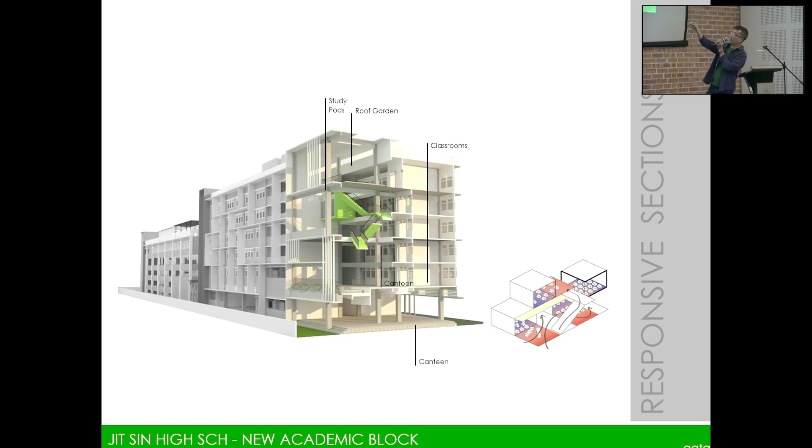To complement that, we extended the corridor width from the standard 5 feet to a minimum of 10 feet. Some of them even extend out all the way to the edge of the left-hand side grid, so that you have a series of platforms connecting the various levels of the classrooms. In doing so, we also introduced a very interesting staircase that links up all the spaces together.

This is a technical section. On the left-hand side is all the framing. Some of it has planter boxes, and the framing also supports these sun shading devices. The sun shading devices reduce the amount of rain splashing into this so-called open terrace, which of course has to be waterproof.

So to link up with the topic raised by Sika just now, all this open terrace is waterproof with a slope against the edge here. We have scupper drains on all levels so there won't be any water ponding on those terraces. You can also see the terrace spaces have a ceiling higher than the classroom ceiling.

That raised ceiling, with cross ventilation through it, has a cooling effect. There's a stack effect going up, so all the hot air rises, and there's also cross ventilation through the classroom space. So the classroom is all naturally ventilated with no issues about median temperature because it's so cooling. Even without the ceiling fan turned on, sometimes when the wind is very strong you can see the ceiling fan turning by itself.

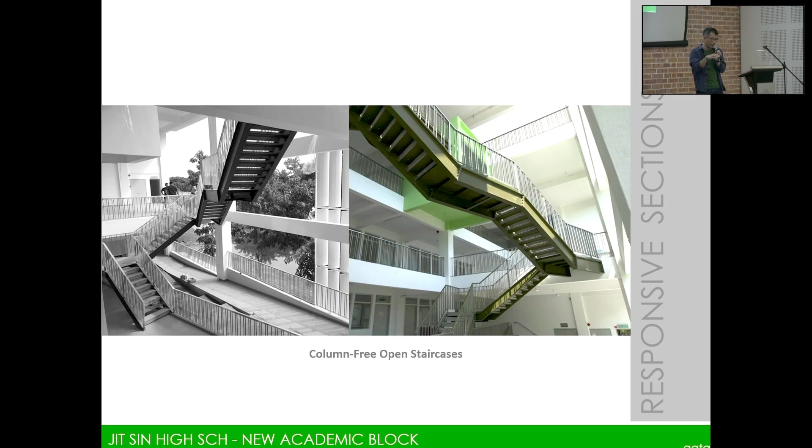So we had to tie this so-called staircase beams to the existing RC columns in a very specific location.

This is a view of the open terrace with the staircase and the study pods together. Notice how different it is from a typical JKR standard school, but it doesn't increase the cost so much because these are all basic concrete mortar, concrete brick, and some railing only. It doesn't increase the cost tremendously, but it definitely energizes all the spaces and the classrooms.

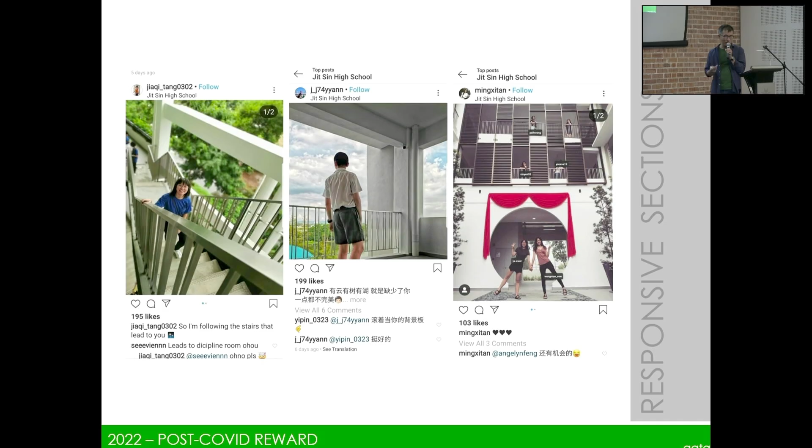The last project I want to bring you before we end the sharing is actually a high-rise project that we completed in 2016. It's a 4-acre land, and it's commercial status.

Can we do something better in our urban housing? This was completed in 2016, during the time when the MRT station was launched, and we were talking a lot about TOD development. In this case, this project doesn't have a direct connection to the MRT, but we were looking at how to improve the urban living condition for the average Malaysian living in Kuala Lumpur.

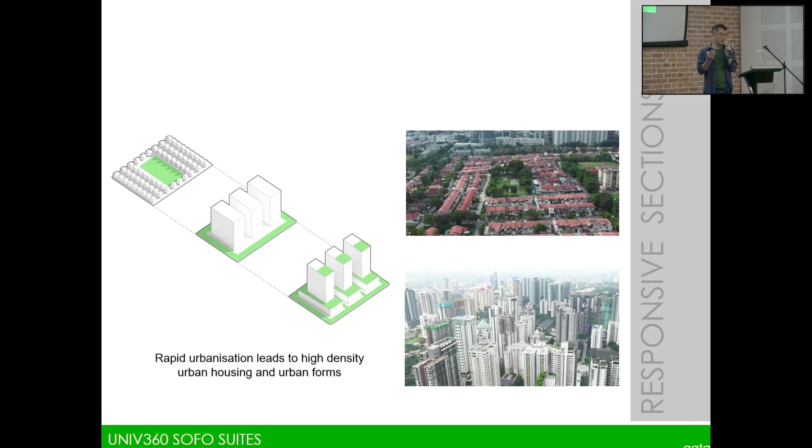But when you go for a high-rise, the density increases 4 times or 6 times, but the green space still remains 10%. I don't think it's fair for high-rise residents, because they are deprived of access to quality green spaces. So our hypothesis was that we must increase our green spaces to at least 4 times that of typical high-rise housing green spaces. In this case, we worked with our landscape architect right from the start.

When we did this project, our SketchUp file, we actually passed to our landscape architect to work with them, to see how we can increase the green ratio or green percentage of this housing.

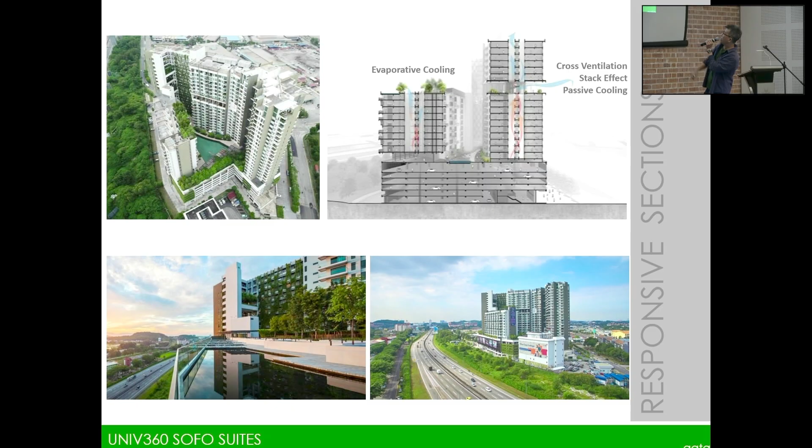This is the building when it was completed in 2016, with the photographer taking a nice corner view of the facade. You notice that the mid-level there, with the double volume space, actually opens up the whole block and breaks down the massing of the tall tower.

Our landscape architect cleverly designed and integrated the pool, which is not the typical rectangle shape. It's actually a trapezoidal shape, but it's good for people who like to swim across, and it also feels more organic and more resort-like. So the green area is more centralized and it's all interconnected.

Rather than some approaches where the green area is all dispersed in the surrounding of the tower block, here it doesn't have that kind of serious impact onto the space.

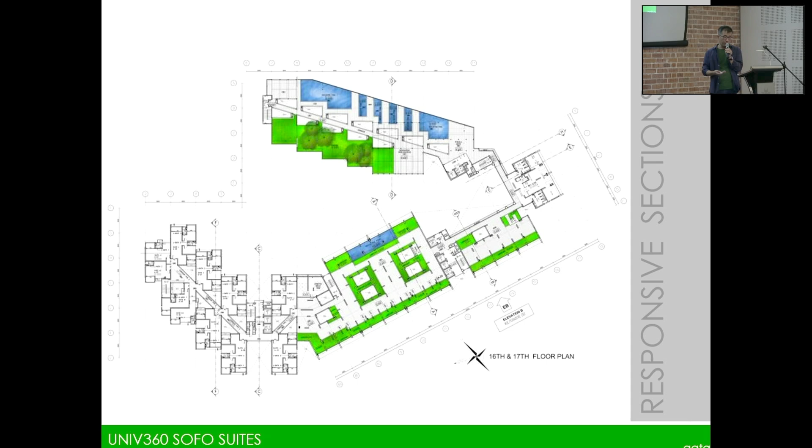This part shown is the beam that supports the shear wall on top. We cannot transfer it to a full column, so we use a shear wall column, rather long, similar to a car park column, a rectangle shape rather than square, so that it's easier for us engineers to design the transfer. This long column supports the beam that supports the shear wall on top, so it's kind of like a mini transfer. In terms of cost, it's slightly higher, but not as expensive as a full transfer system.

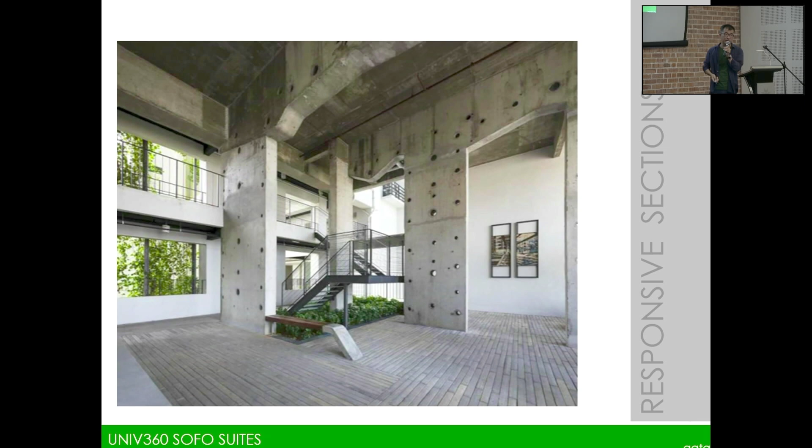So we don't have walls that separate these spaces, so this recreational area is fully linked up together, forming a continuous space for residents to enjoy. This is at level 16. If I didn't tell you this is level 16, you might think it's somewhere on the ground or in the podium level, but actually it's on the level 16 of the building. So you have a lot of walkable space within the tower itself.

And these are some blow-up sections to show some more of the technical solution. So both edges of this sky terrace also we have planter boxes, because it's the most on the outside of the perimeter of the building. So when it rains, the rain will come in. So instead of having a concrete slab or whatever, we introduce the planter box to collect the rainwater.

This is also the best place to have landscape, because you have natural light coming in. Otherwise, if you have landscape in the middle of the building, you don't get much natural sunlight to let the plant grow healthily.

This section is quite meticulous. You can see that the columns form the same alignment with the shear wall on the upper floor - grid number 13, grid number 14, grid number 15. There's also an intermediate grid between 14 and 15, which is normal, because most of our units are forming based on the car park grid 8.5.

Then we have another wall that separates the living and the bedrooms. So those shear walls also need to be supported below as well, so that the structure is more effective. But then, because of the columns, the spaces are all interconnected on the longitudinal axis.

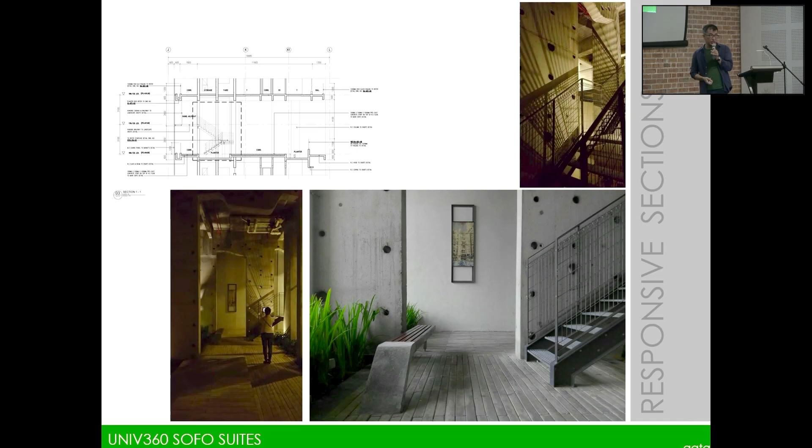Another feature is that for most high-rise apartment lift lobbies, the developer will just ask us to put another unit just outside the lift lobby. So in this case, we actually opened up this lift lobby to a pocket garden.

Every 3 levels there's a pocket garden, and it's deep enough that we don't need any doors to close up the lift. Even if there's heavy rain, the overhangs are deep enough so the rain won't splash into the lift lobby. And the lift lobby is always well lit, naturally ventilated, with the pocket garden to the front and back of the spaces.

We also introduced a hanging garden for the single-loaded units. It's very nice for apartments to have some single-loaded units - most of the time developers just maximize double-loaded corridors, but here we have units with single-loaded corridors. In this case, we also introduce a pocket garden or hanging garden, bigger in size, spanning about 2 grids across, with no columns introduced.

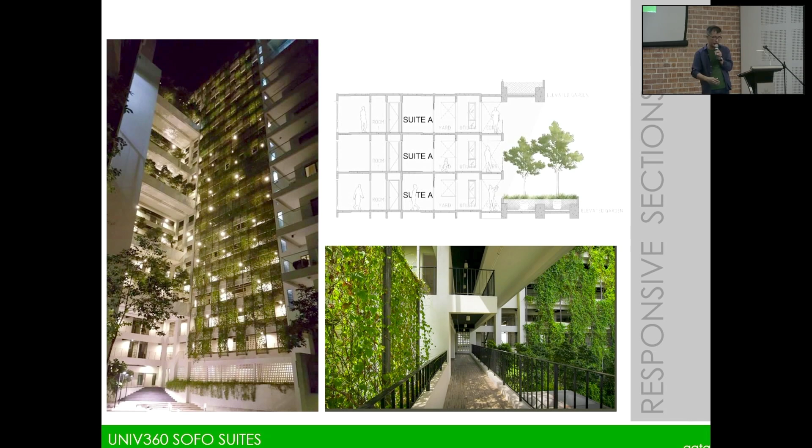All these slabs and planter boxes actually hang from the existing structural columns in the building, in the original planning. This space also has a vertical landscape that spans from level 7 all the way to level 24.

In the end, we managed to achieve a 58% green ratio, which I think is quite an achievement, because I don't think you'd compare to any high-rise housing in KL particularly that has such a significant green percentage.

So I often go back to do an evaluation, to see whether the landscape is well maintained, because I use this as my teaching material for my students in the master studio, teaching part-time in UM for the high-rise studio. I use this as a case study for the students.

Every time we bring the students back, we still feel the landscape is okay, still well maintained, because we don't specify difficult plants to maintain. These are all very hardy, natural plants suitable for our tropical climate, and we always have deep planter boxes with earth, soil, and good irrigation systems so the plants can grow very well.

This project won a PAM award in 2016 as well, and also a Star Property Award. Our landscape architect, in the same year, also won the MLAA, the Landscape Architect Award.

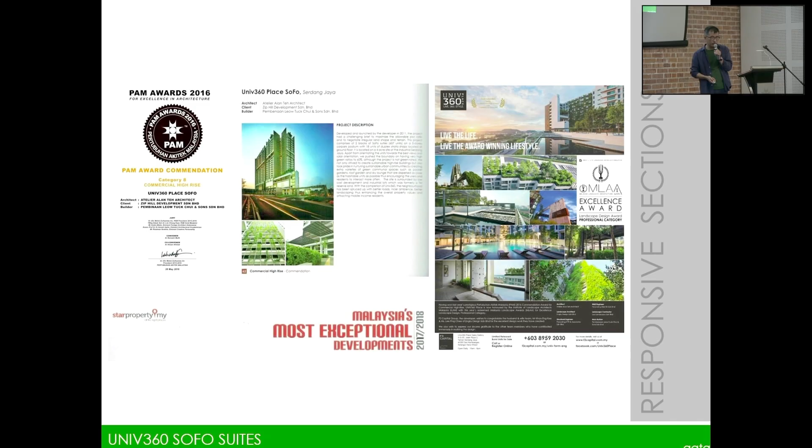So in summary, during COVID also, we tried to formulate the direction for our firm, in conjunction with our 20th anniversary. Basically these 4 key factors or key objectives are actually the main thrust of our practice: focusing on sustainability, collaboration, even CSR, because we work with a lot of NGOs for the projects as well, and also research, experimentation and innovation. We work with different materials wherever we can in our projects.

Yeah, so this year is our 20th anniversary and we just celebrated our anniversary recently. So with that, I end my sharing today.